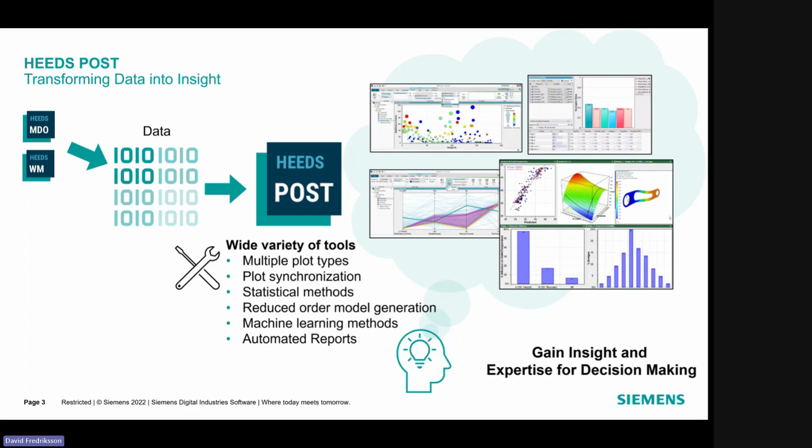But one feature that came into HEEDS Post after the release 2020.1 was a guided workflow. As you can see here, prior to 2020.2, you had the Home tab, where you had access to creating different plots and reports and custom views and whatnot. But after 2020.2, we have 3 new tabs that are going to guide and help users transform the data into insights. These are the tabs we're going to focus on today.

What are they and how do they work? Please make comments and also explain how you use HEEDS Post today.

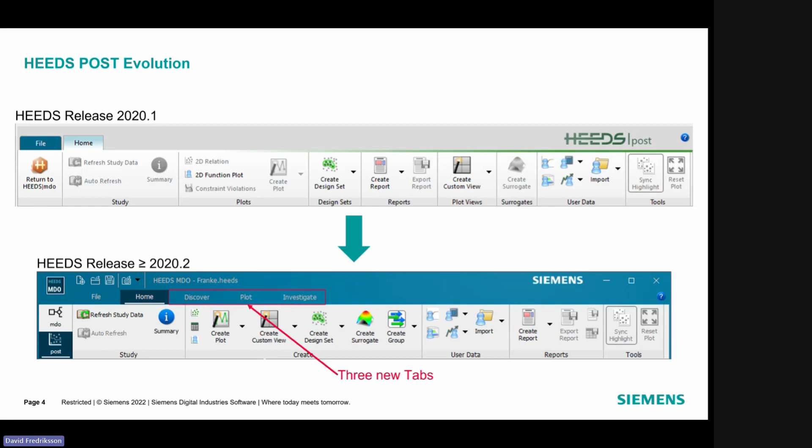So each of these tabs has a purpose. The first one is Discover. It's basically a way to help you make different plots, different combinations of plots, to discover different clusters or different kinds of designs that are similar enough to gain some insight into the designs that you're after.

The second tab, called Plot, is a way to use canned types of plots that will help you highlight the design set that you have identified from the Discover phase.

And lastly, we have the Investigate tab, which will give you some tools to investigate the design set and find influence, correlations, and things like that, to actually find some value in the designs that you have filtered out.

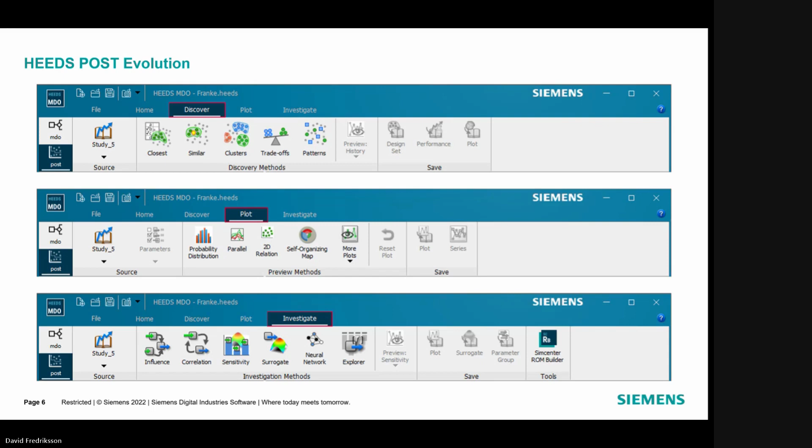So traditionally, we have a bunch of designs that we get from the study run in HEEDS. You can create subsets, different design sets, of all these designs - could be feasible, unfeasible, you can filter in any way you want. And then you would make plots and combine them into views, use those views to find insight and try to investigate how your study behaves.

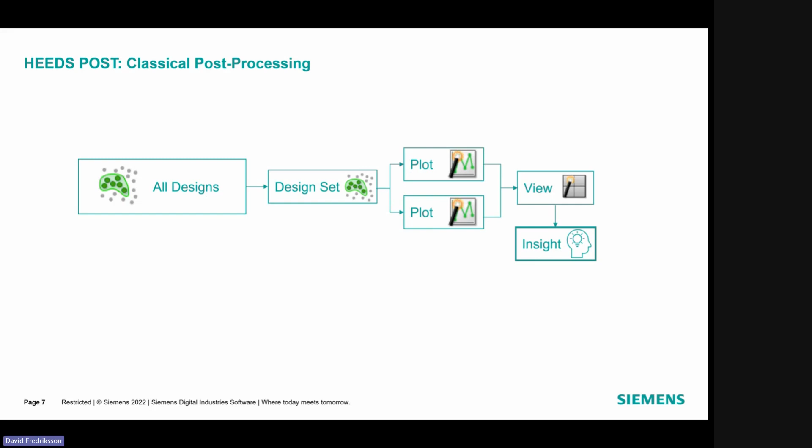So with the new workflow, the Discover tab is basically a way to identify design sets that will be further investigated. Then you have the Plot tab and the Investigate tab to highlight this design set, investigate how these connect to each other, and then at the end of the day, find the best possible insights from your study.

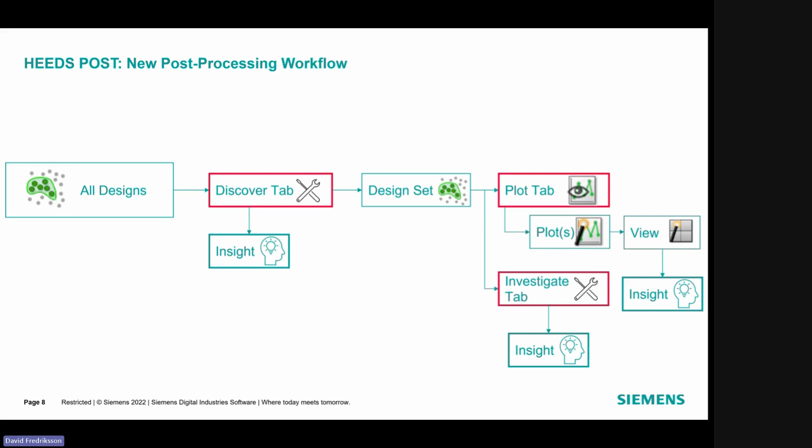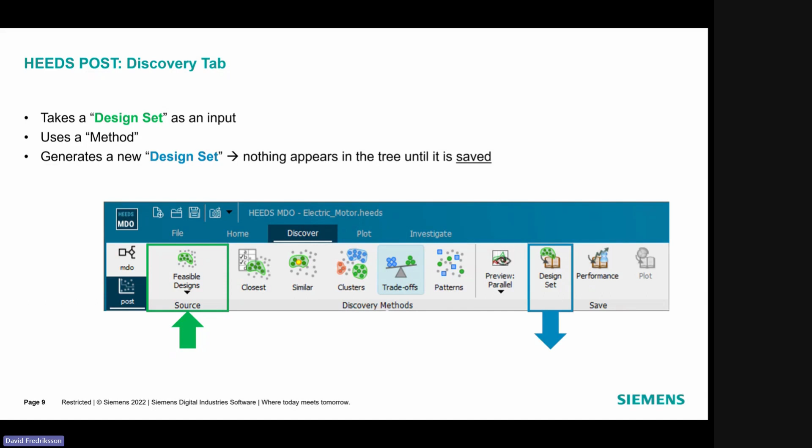So each of these tabs starts with a source. From the source, you select what design set you want to start off using - it could be all designs, feasible designs, or a subset that you have created earlier. Then you have a method that you're going to use, and then at the end, you create a new design set. Based on the method, you can filter out a new design set that is more honed into your objective.

The second tab, Plot, will also use a source where you select the design set, and this could be the one that results from the Discover phase. The results from the Plot method will be either a plot or a parameter series. These plots will be saved in the study, so you can use those in the plot views later on.

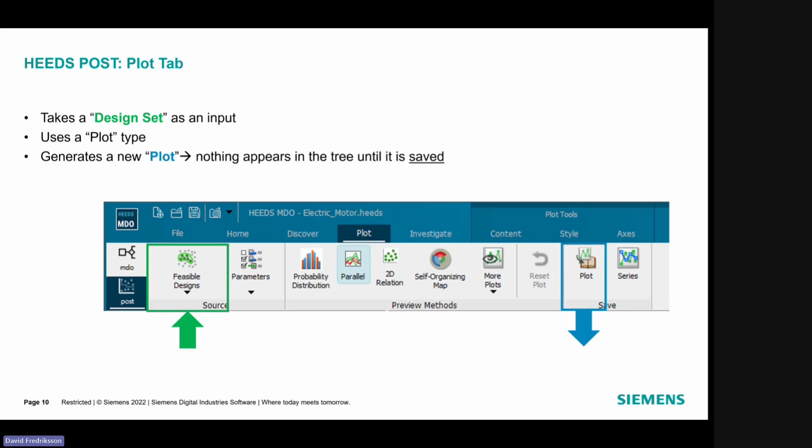And lastly, the Investigate tab again uses a source, and then based on a method, it's going to create plots or parameter groups.

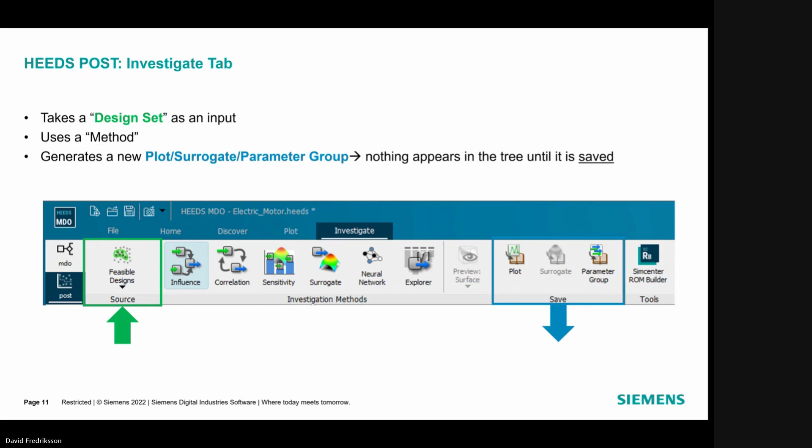So for this purpose, we're going to use an example. It's a HEEDS study that has been previously run using an electrical motor. We're not going to dive into any details about this study - basically we just want to use the resulting design set from this run.

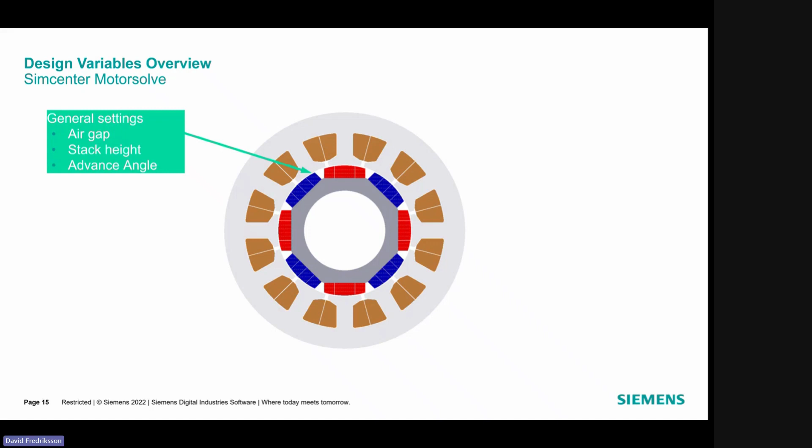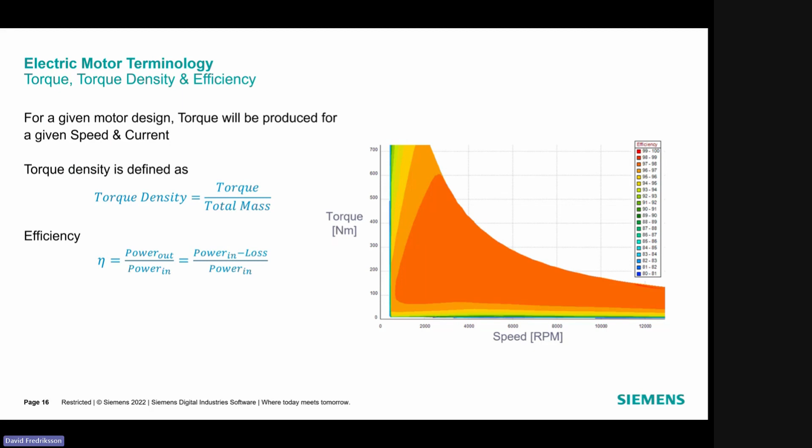There are going to be a bunch of different parameters, so some general settings, some rotor dimensions, and stator dimensions. So quite a few design parameters. And we're going to have a few objectives or responses, and there are going to be 4 objectives: torque, speed, efficiency, power, and so on. And we're going to also look at some different kind of torque effects, like torque ripple and so on.

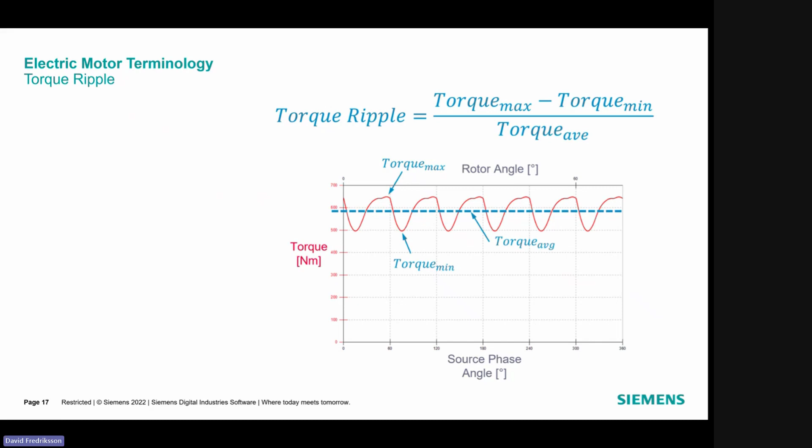So real quick here on the problem that we're going to be looking at, but now we're going to dive into the HEEDS project. So quite a simple process. We start with a Motorsolve, and then we use another analysis to get the mass.

So if we look at the parameters that are used in this study, we have 10 responses, as we mentioned. A few of them are tagged, others are calculated based on a formula. And we have 12 design variables.

So the study will be using 4 objectives: torque and efficiency, we're going to try to maximize, and the RMS value, and also the magnet mass is going to be minimized, and we have 1 constraint.

So this will be run, or it has been run, and based on the design study, we have 254 feasible designs. We got a few error designs and also a few infeasible designs. So this is the data that we're going to try to investigate now.

So when you go into the post tool, we now have these 3 additional tabs. Previously we had the home tab, and we had all the functionality and the features from here. So we still had a large list of different kinds of plots. We could create custom views, could create design sets and things like that.

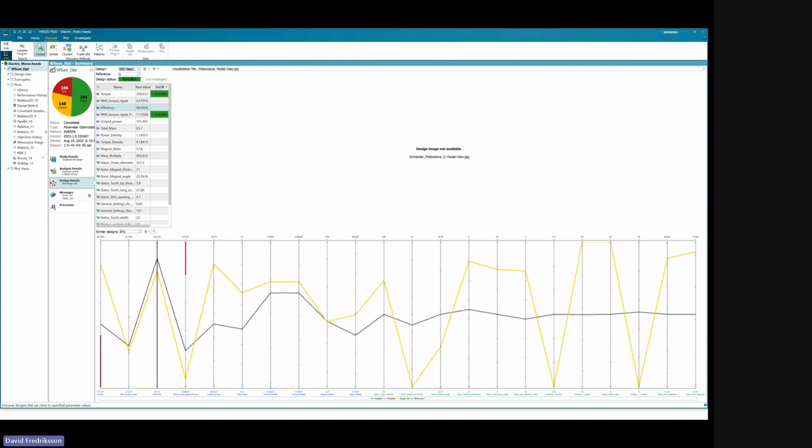And now you're going to select the method. So the first one is closest. Based on the design parameters, you can select one or multiple. If you select one, you get a scatter plot based on the design ID. And you define a threshold, so you want to filter out all the designs that are within a certain range.

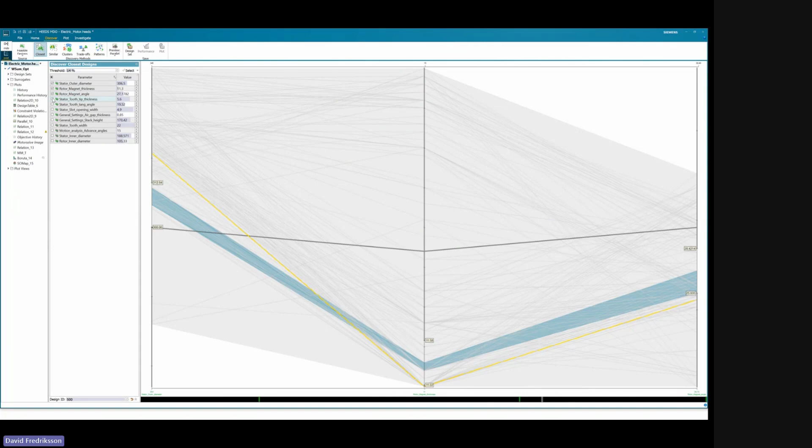As you add on more parameters, now we get a two-dimensional scatter plot with the two design parameters, and we can play around with changing the threshold. As you add on more parameters, it's going to change the plot type, so it's going to be easier for the user to look at. Or you can select all the parameters that are available for the study.

The second one is similar. So it's sort of like the closest, but now we're going to try to find designs that are similar to each other. Or you can select clusters.

So here you define how many clusters do you want to identify these design sets into. Right now it's set to 4, but you can change that to 3, and then it's going to recalculate. We have some advanced options as well here. Down here you define the size of the cluster, so it's going to recalculate and find clusters based on the size that you define.

The next one is trade-offs. Here you select the responses. So if we look at torque and efficiency, for instance, we're going to get a scatter plot based on these two responses and finding the trade-offs between them.

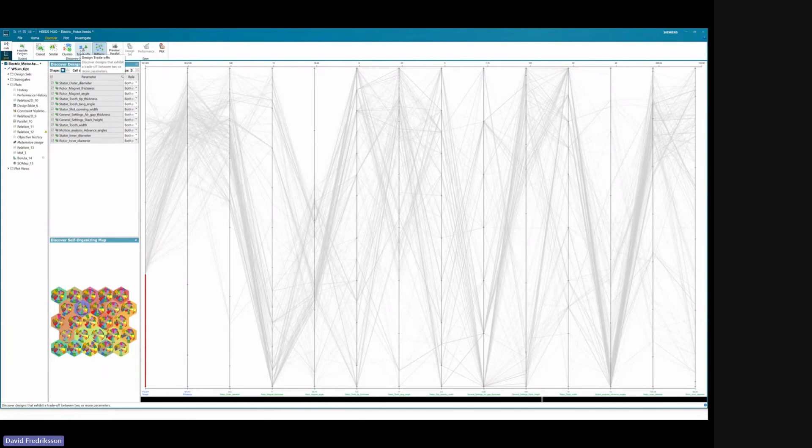And the last one is pattern, which uses the self-organizing map to organize these different designs. The nice thing is that you can go back and forth between these buttons depending on what you're finding. So maybe you play around with the trade-offs, finding different responses and finding an interesting relationship.

Now they're going to be included in the closest plot. As you can see, these are added into the parallel plot that we see here. And now you can tighten the ranges, or you can include or exclude different design parameters as you see fit for your design.

So once you have created the relationships that you find interesting, then you go to save the design sets. It's going to select the ones that you have filtered out, and now we're going to see this design set in your list. So closest 20 was the one that we just created. We obviously didn't have any suitable ranges, so we only got the one design.

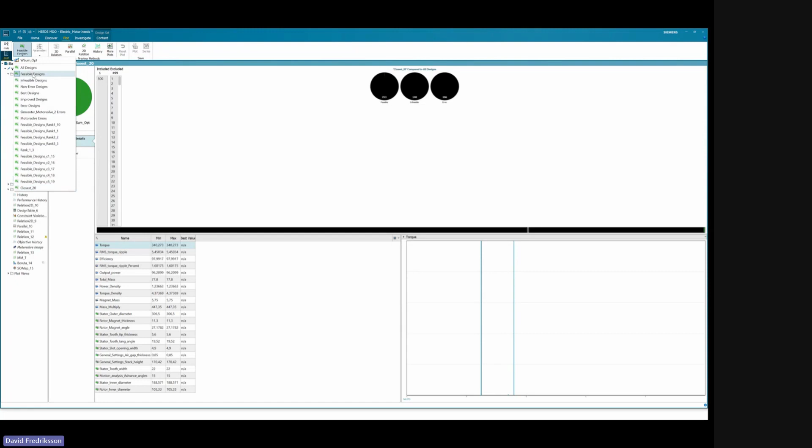Next one up is the plot tab. So let's say you have discovered a design set that you find interesting. How do you create plots that are visualizing these different interactions? Again, you start with a source, and since we only had one for the closest, let's continue to use the all feasible designs. So then you can create 3D plots.

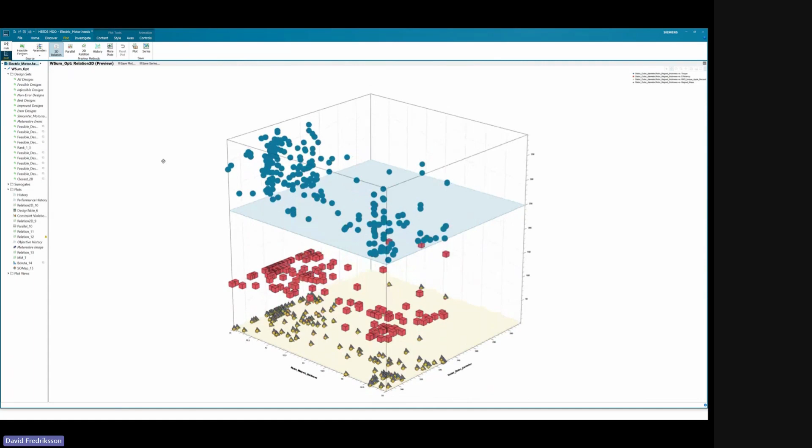You have access to parallel plots, 2D relation plots, and history, or you can create some other plots as well, but it's all based on the discover phase. So once you create these plots, you go into save, and now we've saved this new plot, and that's going to be available for you later on.

So the third tab, the Investigate tab, again we start with the source. You select the source you want to use, and now you have different tools available to dive into the responses or the parameters that you have identified to be interesting.

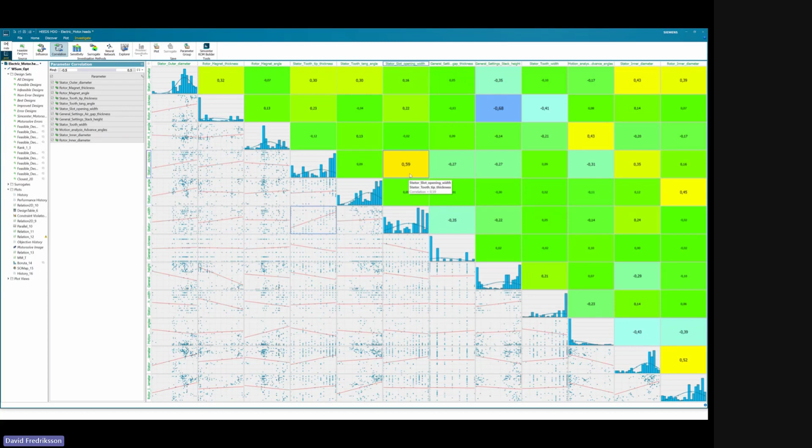The next method available is correlation. If you want to find correlation between the different design variables, you can change the thresholds, the range that you want to look at. This is something you typically would use with a manual approach as well. It gives you a good highlight of how these design parameters connect to each other and finding relationships between them.

Next one up is sensitivity. If we select the torque, then we have a surrogate model, and the torque is based on all these selected design variables. Now we're computing the response based on the response surface or the surrogate. You can include others as well and mix and match depending on what's needed. Just click compute and it's going to recalculate these.

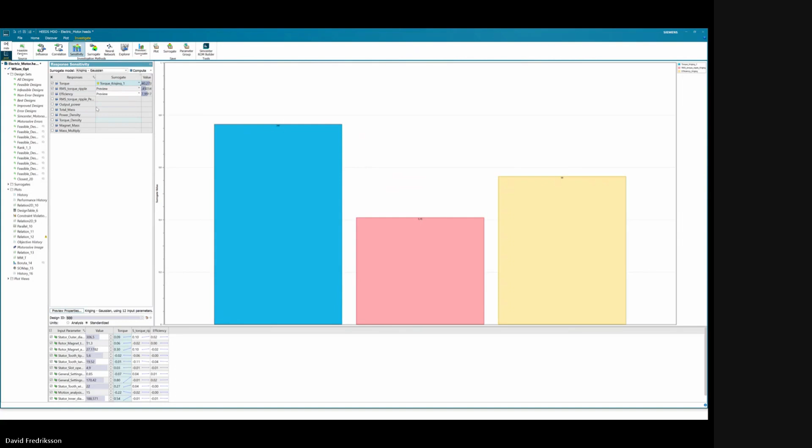Here you can create new surrogate models based on the design study. If you select a certain design, you can go in here and create a new surrogate model, use that surrogate model back in the sensitivity study, and go back and forth as you see fit. We have one that was previously created — the torque was based on the Kriging.

You can right click here to create new surrogates. If we want to use the efficiency, for instance, we click next, and then we have all the design variables. Maybe we want to use a radial basis function this time, and then we have a new surrogate model for efficiency. When selecting the efficiency, we can now select this surrogate model.

The next method is a neural network. This will basically allow you to use the data that you have created here, export a neural network that you can then use in either the ROM builder, or you can include this in another design study if needed.

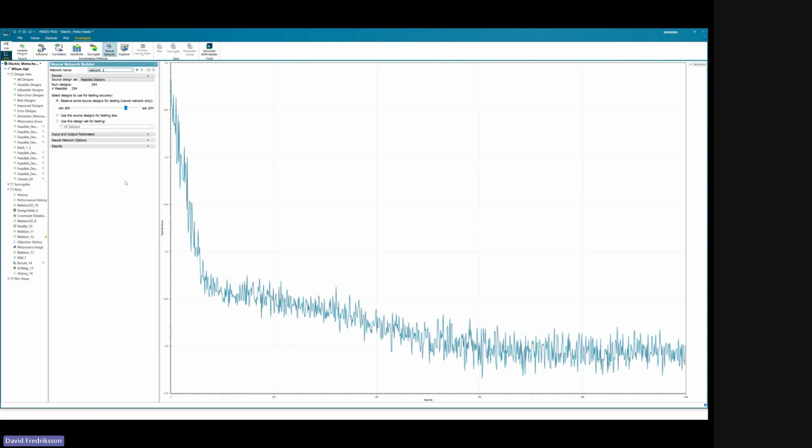And the last one is explore. It will basically allow you to select the responses, select what you want to look at — vectors, tag responses, or formulas — and then you can toggle through different designs to see all the response values.

As I mentioned, the output from the Investigate tab is that you can create a parameter group, and that can later on be used if you want to do other types of studies based on this output, or you can export it to the ROM builder.

Based on these 3 different steps, we now have created additional plots, additional design sets, or maybe even parameter groups. Then you can go back into the Home tab as you usually use and continue to create new plots or new combinations to create plot views, for instance. The plot views can now reference these plots that you have identified through the guided workflow, and then you can include it in reports or anything like that.